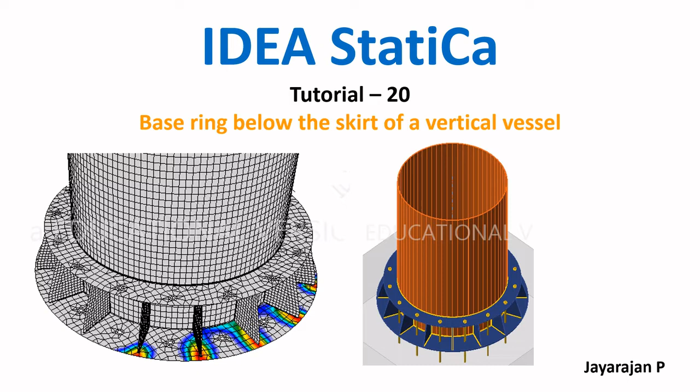The geometry of the base ring below the skirt is shown here. The bottom and top base plates are of annular shape with the top one directly welded to the skirt. Various components, namely the base plates, ribs, anchor bolts and concrete, are verified as per European code. So let us start IDEA StatiCa tutorial number 20.

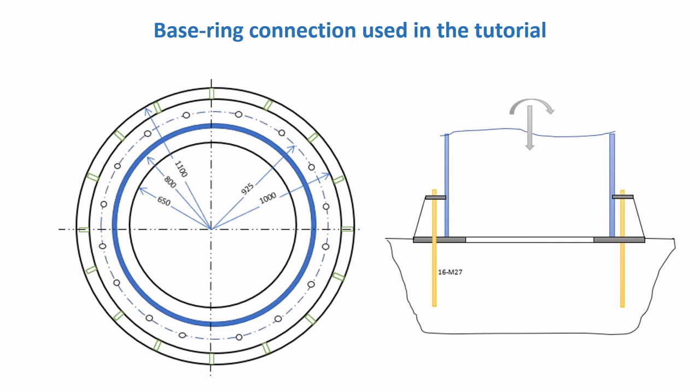So the model for the base ring that is provided below the skirt of the vessel is shown here. I will quickly brief you on the various commands and the manufacturing operations that are used for the development of this model. So let us start. First, it is a vertical skirt member.

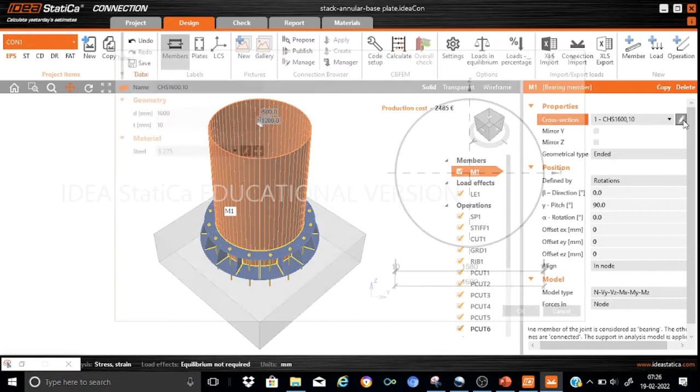As you can see, the skirt member is a circular hollow section with an outside diameter of 1600 mm and a thickness of 10 mm, and is made of the material S275. It's a vertical member, so gamma, the pitch angle, is set as 90 degrees, and the model assumed for the calculation is an N-Vy-Vz-Mx-My-Mz model. Now let us go for the other manufacturing operations.

The manufacturing operation SP1 is a stiffening plate. It is used for the generation of the annular bottom base plate. So you have here the stiffening plate. This will be the manufacturing operation that will be used for the modeling of the bottom base plate.

As you can see, the bottom base plate has a material of S275. It's provided with a thickness of 20 mm, the shape is circular and the radius is 1100 mm. That's all about the bottom base plate.

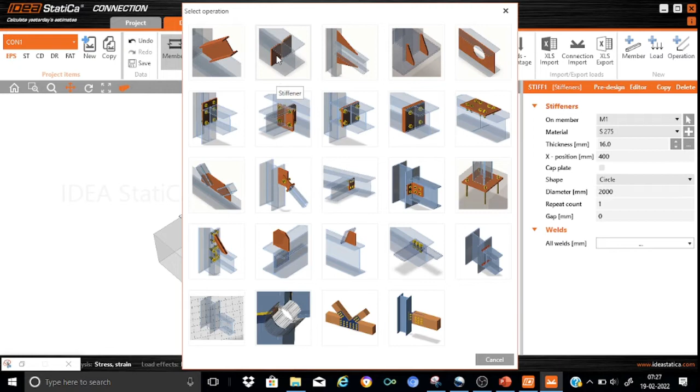Now coming to the top base plate of the ring, it is generated through the stiffener manufacturing operation. If you look here, you'll find that this is the stiffening manufacturing operation.

As you can see, this is connected to the member M1, and it has a material grade of S275. It is provided with a thickness of 16 mm and at a distance of 400 mm from the bottom base plate. So the X position is specified as 400 mm.

The shape is circle and the diameter of the top ring is kept as 2000 mm, and here the welds are provided on both sides as fillet welds of 4 mm size.

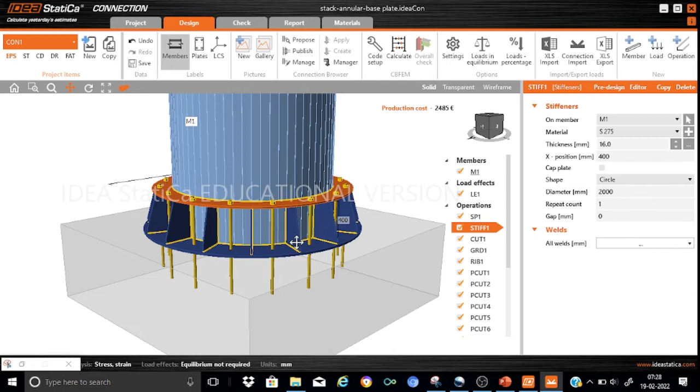Let me just zoom in, so you can see how the model is. This is your bottom ring, and this is the top ring, the top base plate, and you can see that the top base plate is connected to the main skirt through the fillet welds. That is shown here, provided on both sides of the top ring.

Regarding the base plate, I would like to mention one more very important thing: the base plate is not circular, it is rather of an annular shape. This is done through the editor. In the editor we applied a hole operation onto the existing base plate with a hole of diameter 1300, as shown here.

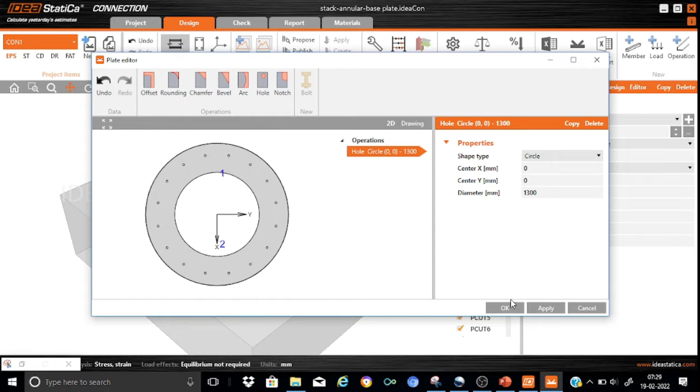If you see the top view, you will find that the bottom base plate is of annular shape. Let us quickly see that. So you can see that yes, this is the base plate indicated in the orange color, and it has an annular shape. Now coming to the

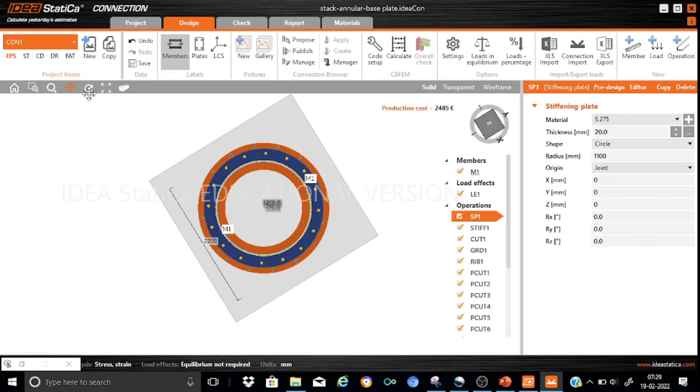stiffener, as you can see, the thickness is kept as 16 mm, and it is provided with a fillet weld of 4 mm size.

Now coming to the CUT1 manufacturing operation. This is basically used to specify the weld size of the connection between the bottom base plate and the vertical skirt.

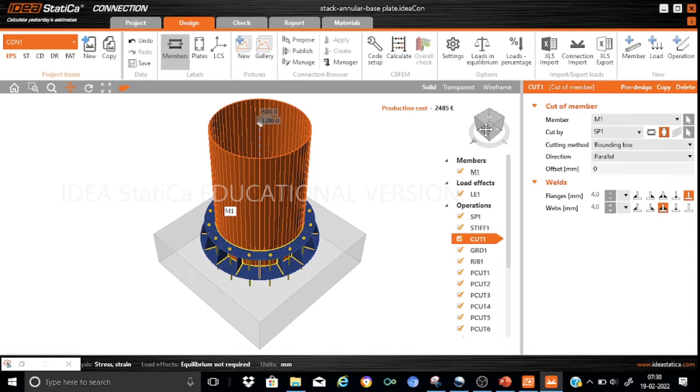Here CUT1 is used for M1, the vertical skirt member, and SP1, the bottom base plate. It is provided with a fillet weld on both sides of 4 mm size. So if we just see this model, you can see that.

So this is the weld operation that is performed through this cut command, that is the connection between the bottom base plate and the skirt. And you will find that the weld is provided on both sides, that is on the outer side as well as the inner side. Okay, so that is regarding the cut.

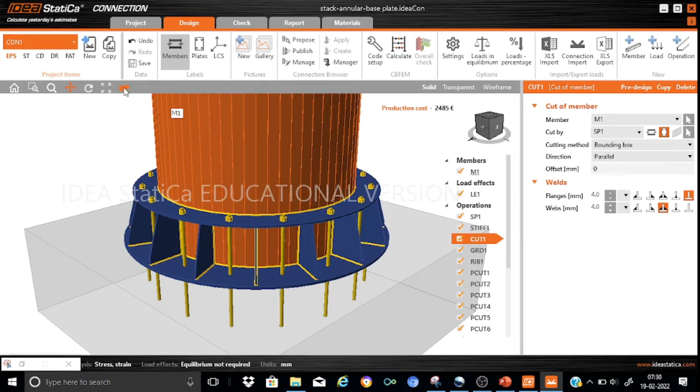Now the foundation block and the anchor bolts, as usual, are generated through the bolt grid command. So if you see the operation command, you will find that this is our bolt grid manufacturing operation. And here you'll notice the various parameters. The first and the most important one is the fastener has to be chosen as the anchors.

And here we find that the bolts are to connect the base plates, that's the bottom as well as the top. So accordingly we have kept the items count as 2, and item 1 is the SP1, that's the bottom base plate, and item 2 is the top base plate, that is a stiffener. And we have selected grade 4.6 anchor bolts with an anchoring length of 400 mm, and the anchor types are provided as the straight ones, right?

And the radius of this anchor ring is kept at 925, and we have kept as per our calculations the first anchor at 11.3 degree angular position and the balance 15 at 22.5 degrees.

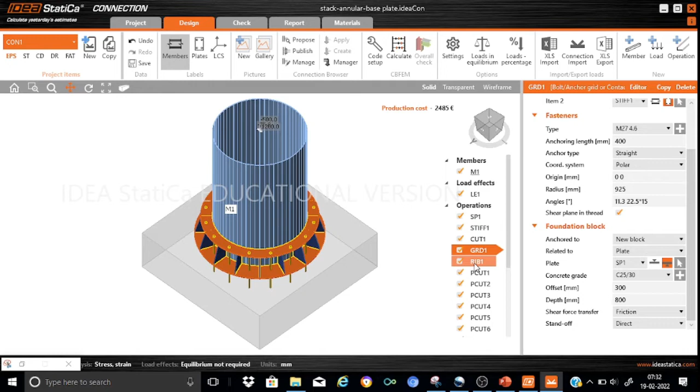And regarding the foundation block, we have selected the concrete grade of C25/30 with an offset of 300 mm, and the depth of the foundation is taken as 800 mm, and the shear transfer mechanism is selected to be the friction.

Then coming to the ribs, as you can see, these are all being highlighted here. These are used to connect the 3 components. That is, it connects the top base plate, the bottom base plate, and it also gets connected to the vertical side of the skirt member as well. So you can see that it is on member M1 and it is related to SP1. Okay, and this is of material S275.

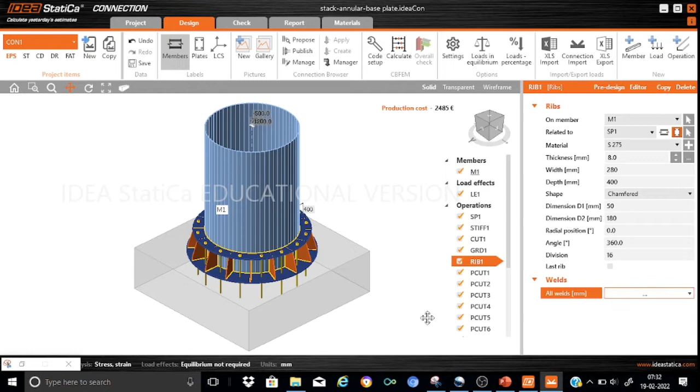The thickness is kept as 8 mm, the width is 280 mm, and the depth is 400 mm, and it is chamfered as per these dimensions. And we have provided a total of 16 ribs, spread over an angular distance of 360 degrees. And here the welds we have kept as the fillet weld on both sides of 4 mm size, and this fillet weld, as you can see, is connecting the stiffener with the skirt M1 and the bottom base plate. Okay, that is our SP1.

Now we need to mention the weld connection between the rib and the top base plate. This is done through the manufacturing operation plate cut command. So we have got 16 ribs. So accordingly 16 manufacturing operations are provided here in order to ensure the both-sided fillet weld connectivity between the rib as well as the top base plate.

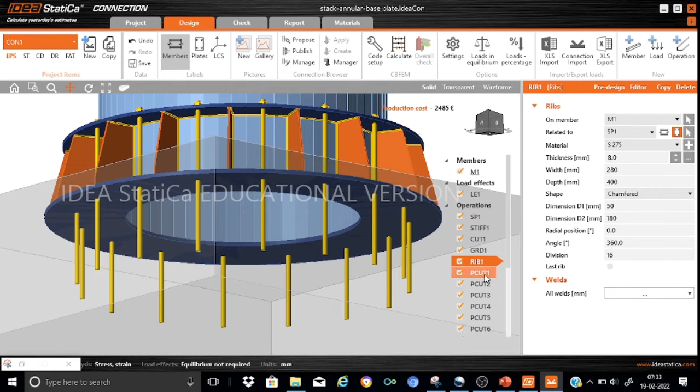So for example, I just want to take one, PCUT1, where you will find that it is a cut operation, connected to the rib specified as RIB1a, and it is cut by stiffener one. So this is basically used to specify the weld connection between the rib and the top stiffener, and all the welds are both-sided fillet welds of 4 mm size. So the connection between the 16 ribs and the top stiffener is executed through the plate cut manufacturing operation.

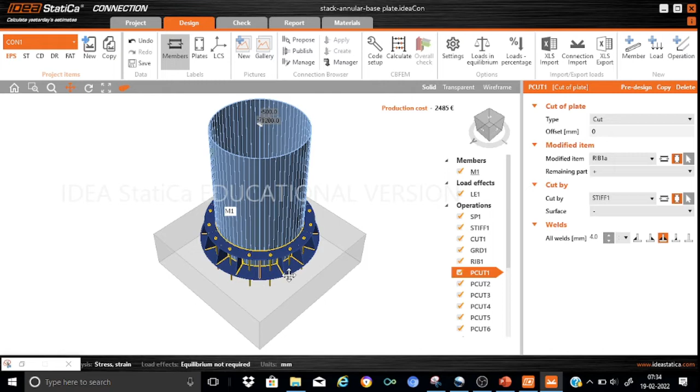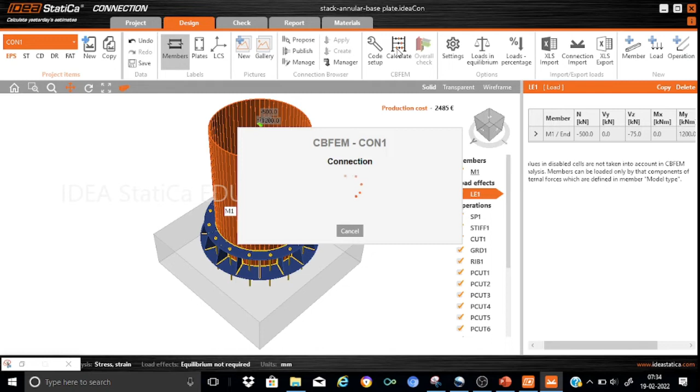Okay, so that is all regarding the various manufacturing operations and the commands used for the development of this model. Now let me quickly introduce the loading case that we have used. We have subjected this skirt to a vertical load of 500 kN with a shear of 75 kN and a moment of 1200 kN meter. So let us proceed with calculating this model. This may take 5 to 10 minutes.

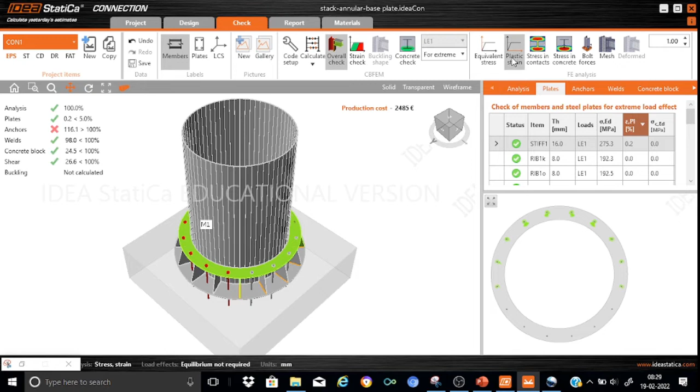And we can quickly see a distribution of the plastic strains in the model. What we do is that we just press the plastic strain, and let us also try to mesh it so that we will see exactly the distribution. This is a little bit large model, so this is taking a little bit of time. So yes, now it is all right.

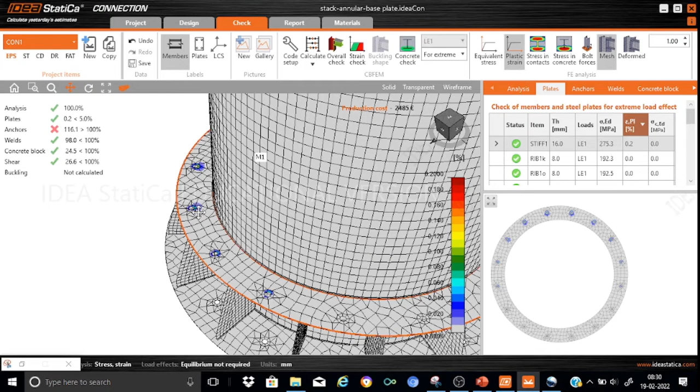As expected, you can say that this is the tension side. On the tension side, you find that just at each bolt location, the plate has undergone some kind of strain disturbance. That means we have a larger strain of 0.2% getting accumulated at the bolt locations as shown here, and that is also evident in this simple sketch. So this is how the strain distribution is, and we conclude that the top ring is critical for us as far as the strain is concerned.

Now let us go to the anchors, and here regarding the anchors, let us quickly see. We know that there are some problems in the anchors because our stress verification has reached up to a limit of 116.1%. So we find that the maximum tension force in the anchor is 64.5. Now quickly see whether this is good enough from the structural capacity of the bolt itself. So we just press this plus, to see that here, yes.

The capacity of the anchor bolt, considering its yield stress, is 78 kilonewton, and this happens to be greater than the maximum load of 64.5 kilonewton. So we don't have any problem from the material of the anchor bolt. It does mean that it is some other mechanism which is governing the failure of the anchors. So we will go through that in the detailed report in order to see what mechanism is governing the anchors, etc. Now going straight to the welds.

So regarding the welds, what we find is, this is a little bit bigger model, so it is having some kind of a time problem. So let us quickly see which of the welds is critical, because in the analysis part, it is important that we critically review each and every component. And if there is a scope for keeping some sections slender or reducing the weld size, do it so that we make use of 100% of the capacity of each and every component.

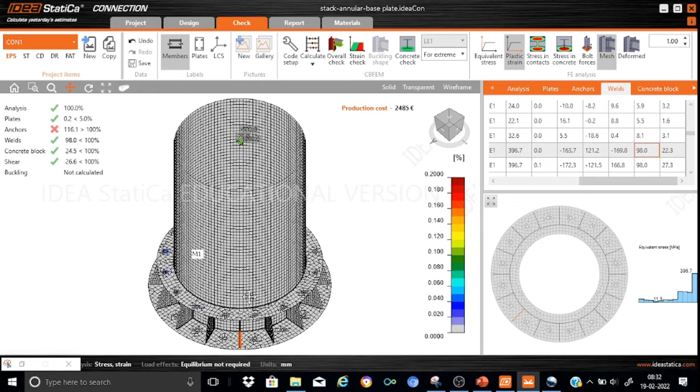Now regarding the welds, what we find is that we have some 98%. So let us see. Yes, for example, these are some of the components. So this is in general connecting. Okay, so let us just quickly zoom this portion. Let's rotate. What I do is that I will just zoom it a little bit. Okay, so we can just see which component is critical for us.

So here what we see is that it is the connection of these vertical stiffeners, popularly known as the ribs, with the bottom base plate that is getting critical, as is identified by the welds. It is expected because these ribs are subjected to a very high level of compressive forces, and the welds are subject to high shear stresses as well. So we find that these welds are taken to a tune of 98%, and we find a similar kind of stress utility for other ribs as well.

For example, if you see this, yes, it is this rib. That means a lot of the ribs that are on the compression side are making the welds connecting them to the base plate very critical. So if we want, we can slightly increase it from 4 mm to 6 mm, so that there is a sufficient factor of safety for the welds.

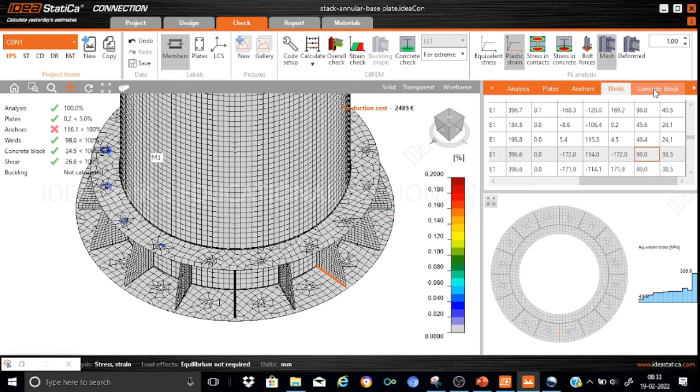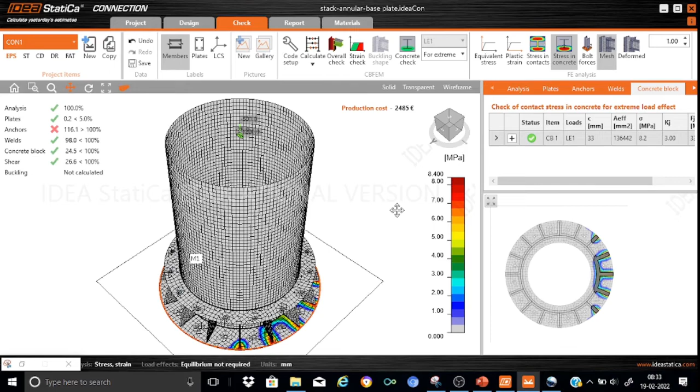Now let us quickly go to the concrete block. Let us just preview the distribution of the bearing stress below this base plate. What we do is that we just press the stress in concrete. So we get a distribution of how the bearing stress is getting distributed below the base plate. So we find it's a distribution which is as anticipated. We find that this is the compression side, so the compression side of the concrete is getting critical.

As you can see, the stress distribution is concentrated around the stiffener locations as is shown here, and we find that still we have got a sufficient margin as far as the bearing stress is concerned. It has gone only up to 8.4 MPa. Whereas from the concrete block verification as per the code, you can go up to a design bearing stress of 33.5. That is, the utilization is only say 24.5%, very much below the 100%. So we don't have any problem as far as the bearing stress is concerned.

So in the report itself, it will provide you whatever we have discussed regarding the plastic strain distribution, the bearing stress distribution, also the overall equivalent stress distribution, everything, and it also provides you how the verification for these anchors has been carried out and which mechanism is governing their final acceptability.

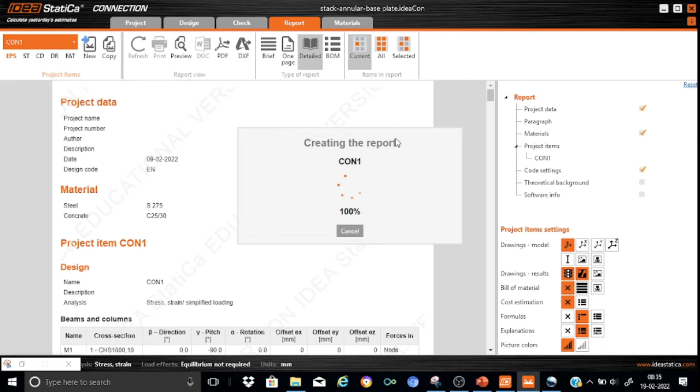So let us quickly, because it's a little bit of a larger model, creating the report may take say 10-15 seconds. So let us see it. Yes, now it is available to us. So look here, whatever we have discussed, we can quickly preview this here also. It's a very beautiful report. Anybody can easily read it.

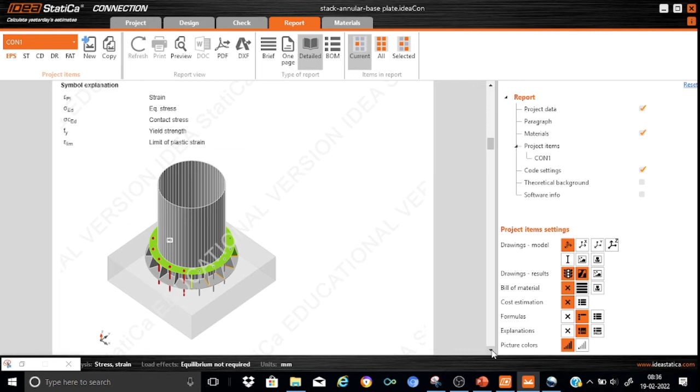So as expected, we find that this is the strain level. We find that the strain level is getting critical on the outer stiffener plate, going up to say 0.2%. And this is the distribution of the equivalent stresses. As far as the skirt material is concerned, we don't have much problem. The stresses are going only up to the tune of say 100 Newton per mm square.

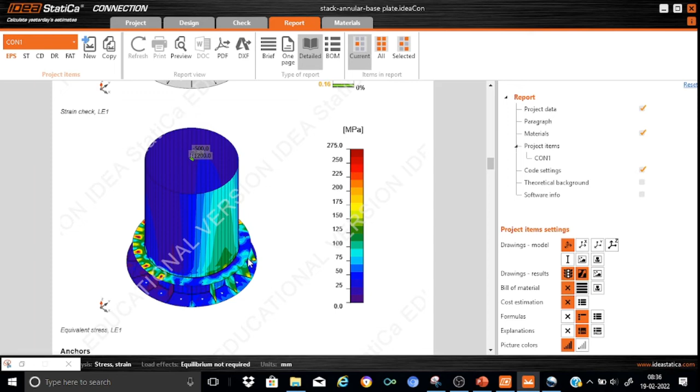But regarding the top stiffener plate, we find that the stresses are going up. It is expected that the stresses should go up in this region because of the large tensile forces being transmitted to the anchor bolts. So here the stresses are going up to even 275. If we want to restrict the stresses to a level of say 200, we can slightly increase the thickness of the top stiffener.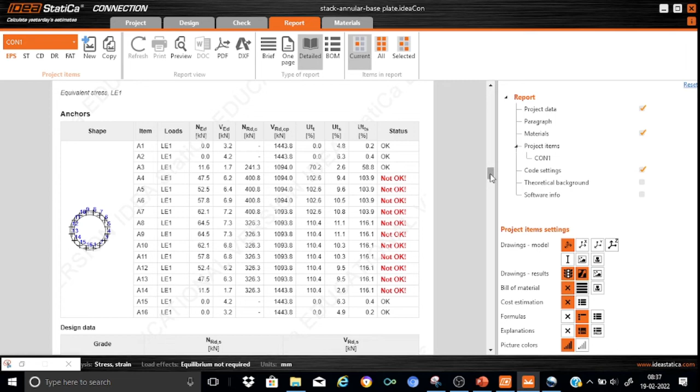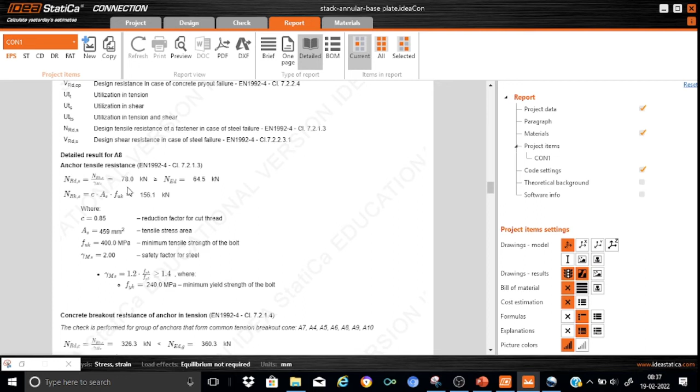Now going down to the other one. These are the anchors. They are creating a not okay command. We are not comfortable with them. So let us see what is creating the problem. From the tensile resistance of the anchor bolt materials, we don't have any problem because capacity is 78 kilonewton, which is far more than 64.5. So it is something else causing the trouble, and that is clearly dictated by this failure: the concrete breakout resistance. It is this breakout resistance that is making the anchors a little bit critical.

So here, how the check is performed is very clearly stated. The check is performed for a group of anchors. Rather than an individual anchor, the anchors in the tension zone are considered clubbed together, and a common failure surface in the concrete breakout is assumed. Based on that, they computed the factor of safety. They have considered 1, 2, 3, 4, 5, 6, 7 anchor bolts together.

And here the concrete capacity is going up to the tune of 326.3 in the concrete breakout resistance, whereas the sum of the tensions in these bolts is 360.3. So the resistance is less than 360.3, and we conclude that it is the concrete breakout resistance creating the trouble for us. We can solve this issue in two ways. One way is that we increase the offset edges of the foundation so that we have a larger concrete area for the breakout failure.

And one more thing is that all these computations are based on the assumption that no reinforcement has been provided in the pedestal, but in the pedestals for vessels we provide a larger amount of reinforcement, and we can include this reinforcement in the actual calculations, which provides significant improvement in the concrete breakout resistance. And even if this does not provide sufficient margin, we have other ways like providing reinforcement U-clips around the anchor bolts to improve their capacity.

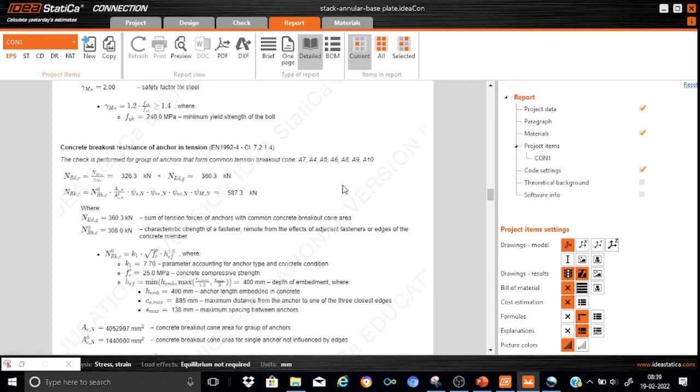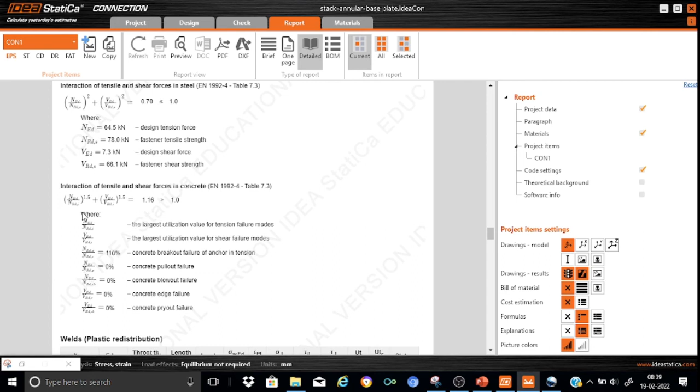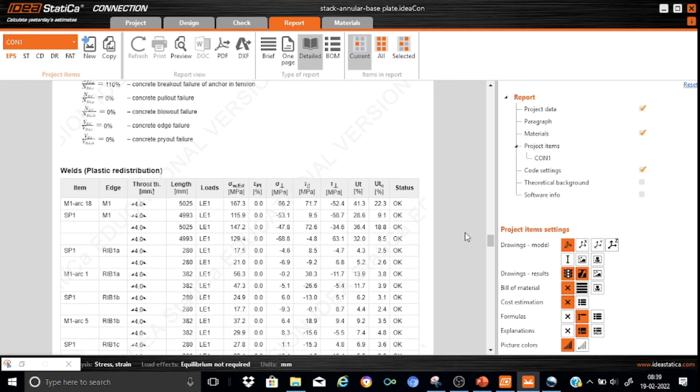Okay, so here we find that the interaction between the shear and the tension is getting critical, going to the tune of say 1.16, greater than 1. So this is all about the verification of the anchors, and this is the welds verification. We have seen already that the weld connecting the ribs with the bottom base plate is getting critical to the tune of 98.8%. So this is all regarding a very detailed review of the results that we obtained from IDEA StatiCa.